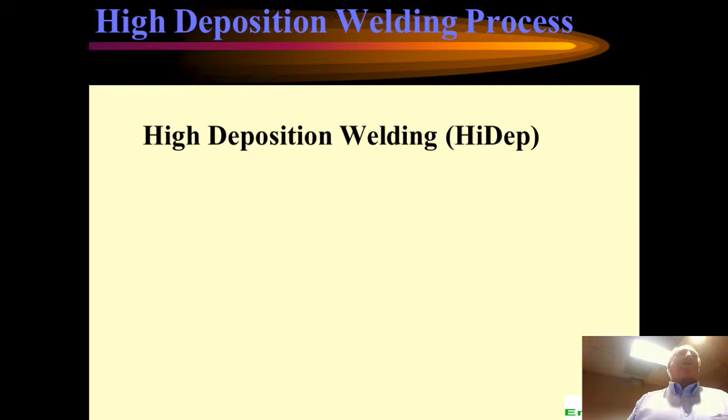I'm going to start out with this new process that we call high deposition welding. Officially it's going to be induction hybrid arc welding, but until we get the first one in production, which we're starting on right now, AWS won't give it an official name. So we're calling it high dep because we started out with it being high deposition. So induction hybrid arc welding might be the title of it. What we do is put a very high power induction coil in front of the torch, and then run it just like an ordinary welding process. But we have two independently controllable, equal power heat sources now, which completely changes our ability to do things to the thermal profile of the weld that we could never do with an arc.

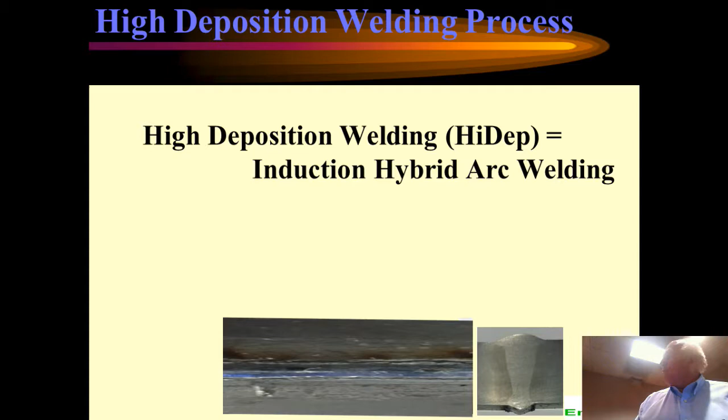So the advantages of this I'll talk about as we go forward. But I'm going to talk just about the basics of the process: butt joint welding with it, fillet joint welding with it, and another little benefit that comes along with it that I'll explain later.

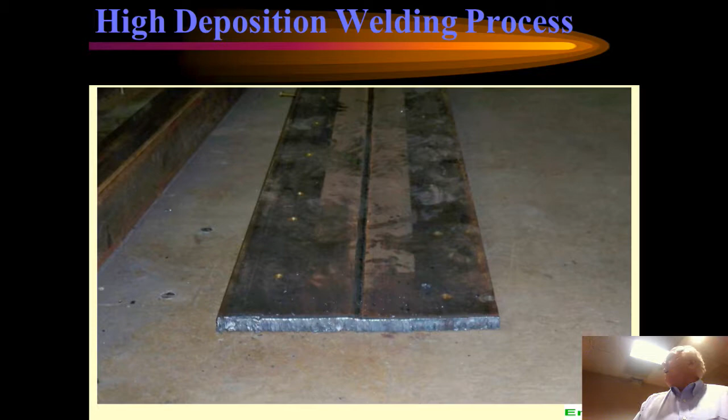So if we look at the process, one of the biggest advantages is that for essentially all the applications, we have completely eliminated weld distortion with this process. When we made the first weld, back in 2011, somebody noticed that the plates were sitting flat on the floor, that there was no weld distortion there. We created the process so we could go faster because we needed an application, but we've been exploiting this, and it's been the hallmark of it. We typically have travel speeds in the range of 4 to 8 feet per minute, and we can actually go faster than that. Single pass on 3/4 inch butt weld joints.

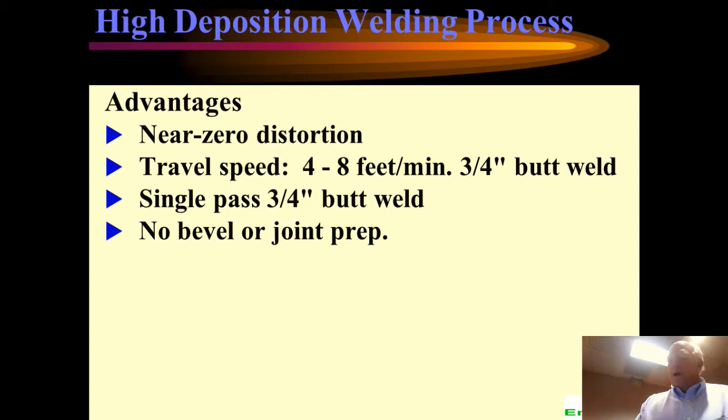We don't require any beveling or joint preparation. We just use a square butt joint with a fairly small opening. Flame cut plate edges - we don't have to do any special preparation to it.

The total capital cost is about 2 times what a standard arc welding system would cost. But when you compare it to the other process that's out there right now giving us low distortion welds, which is laser hybrid arc welding, there's no comparison in terms of capital cost. The laser is just amazingly expensive compared to this process.

So the operating cost, for the most part, because we can go faster, is actually less than for standard arc welding. It uses all the equipment that's already existing in most major fabrication shops. So it's not like having to go out and buy a laser and learn how to run it and maintain it and that sort of thing.

And we can make it portable. You'll see the equipment out here that we can use to make it portable.

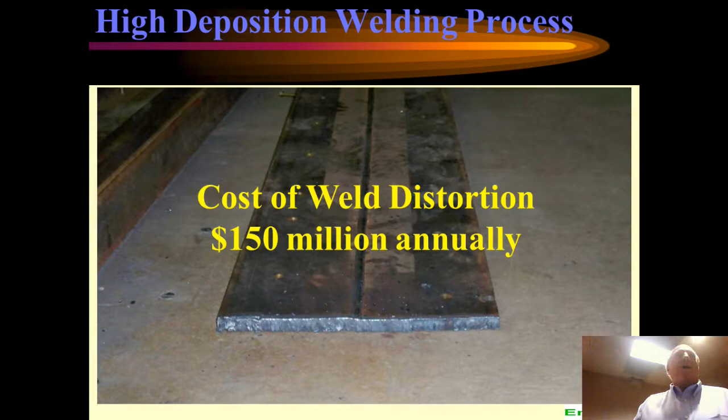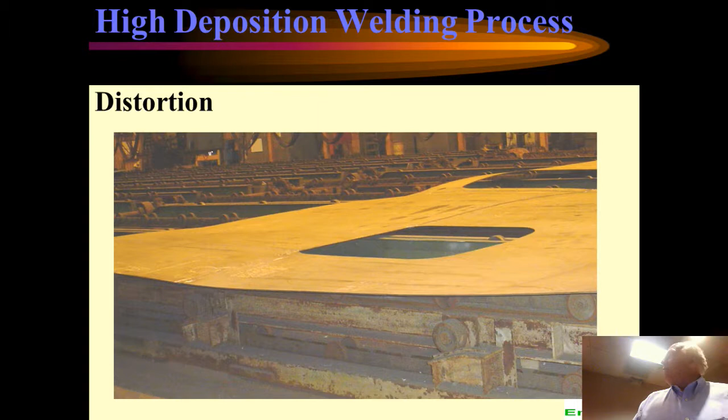The other part is - and I didn't bring a laser, so I'll go over here and point at it - if you look at how they make decks to keep the weight down, they'll have a deck plate and weld T-stiffeners underneath it. Where those T-stiffeners are welded, you get weld distortion, and that causes the deck to dip down like this. You can see this in the picture.

There's a T-stiffener welded under this deck here, and one here, and you can see the big gap underneath that straight edge. So those are the kinds of problems that we have in the Navy, and certainly in a lot of heavy fabrication applications that are due to distortion problems.

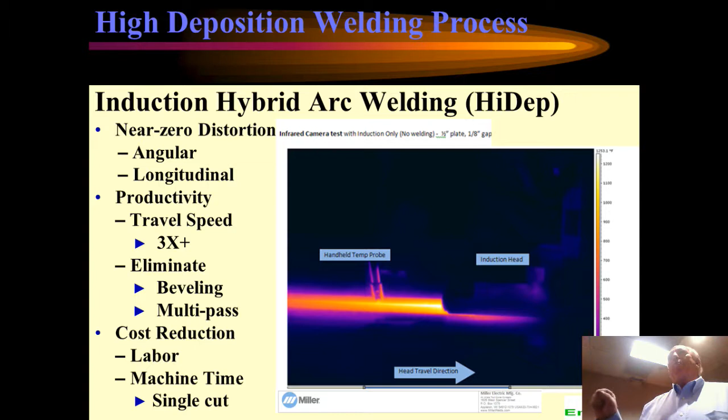Miller did a little work on this at first when we started looking at it, and they got us a nice video of what just the heating from the induction looks like. I think it's important to note - I know you can't read the scale there - but we are actually bringing the surfaces of the weld up to the melting point before the arc ever even gets there. That's really a key point to the process.

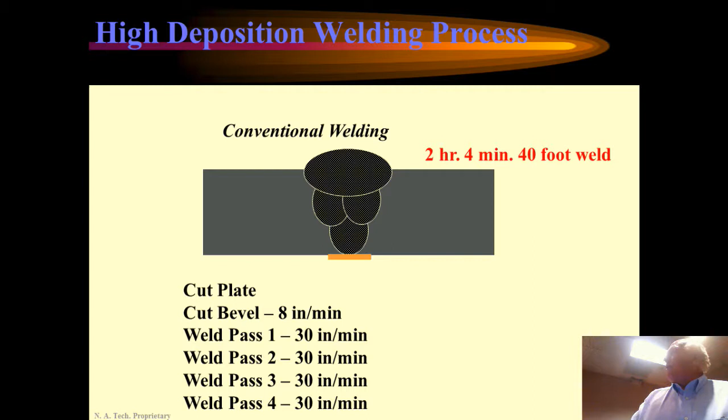So if you look at conventional welding on fairly thick material, we're going to have to make a V groove so we can get the torch down in there. Although Eric later this morning is going to talk about a new really cool process for not having to do that. But if you look at cutting the bevel and then making the various weld passes to produce it, the total preparation time plus welding time is about 2 hours and 4 minutes to make a 40-foot weld.

With this new process, the high deposition process, we're single pass - don't have to cut any bevels, don't have to make all those other passes - so we're actually at 8 minutes total preparation time and welding time.

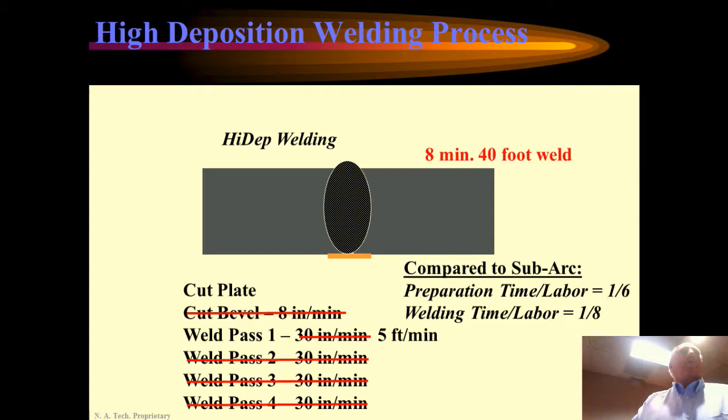And this is what we were after, because what we're trying to do is build the world's tallest wind tower. Wind tower structures are such that to go taller, they have to get bigger around. If you've seen any of these things being transported on the highway, we're done - we can't make them any bigger around and still transport them.

So the key is to make a portable, automated fabrication facility that can actually fabricate the towers on site and move from wind farm to wind farm.

In order to do that, to make it automated like an auto assembly line, we had a cycle time we had to meet to be economically viable. I have to make that 40-foot weld, including putting the plate in position, making the weld, and getting it set up for the next plate to come in - I have to do that in 15 minutes.

So I've got to make a 40-foot long seam weld in 3/4 inch thick steel plate in 8 minutes. I have to do that. So that was the reason why we invented the process and why we call it the high deposition process, because that's what we wanted from it. This really is quite an improvement over submerged arc, for example.

And if we compare it to the laser hybrid arc welding system, there's just really no comparison. I mean, it's just outrageously expensive compared to what we're doing.

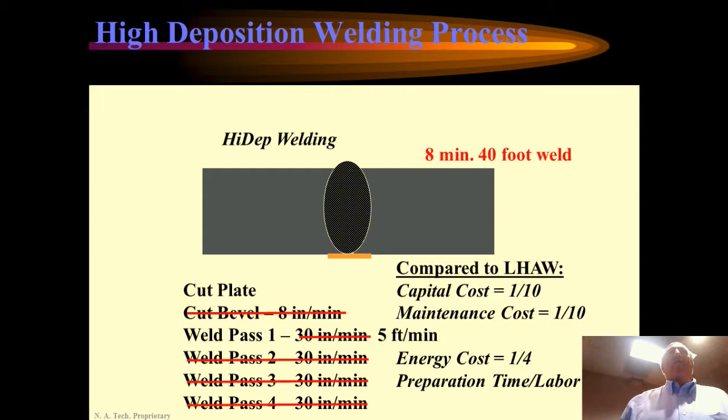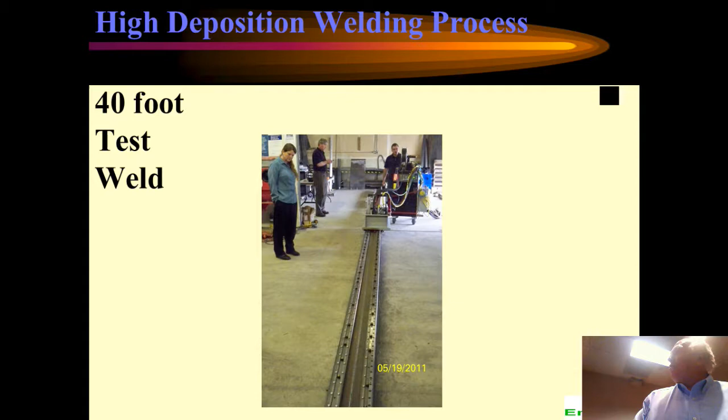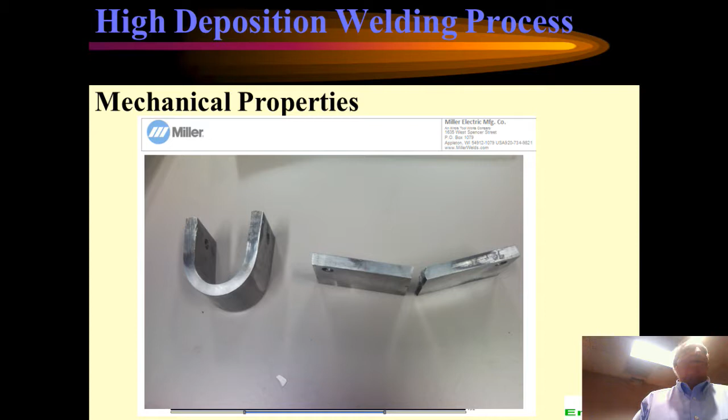This is kind of an interesting experiment that Miller did. They said, well, let's make a weld with this process, and then let's turn off the induction and see how much difference it made. Obviously the one on the left was made with the induction on, and the one on the right was made with the induction off. So clearly it made a big difference.

So basically what happens with distortion is that when you use traditional arc welding, the arc is a giant heat radiator. Everything closer to the arc gets hotter, and everything further away is colder, and so you end up with a thermal profile that looks like that. Those arrows indicate how much shrinkage takes place, and that's what causes the distortion.

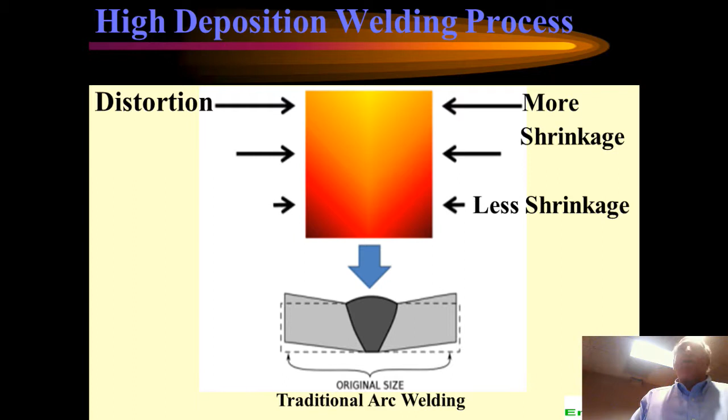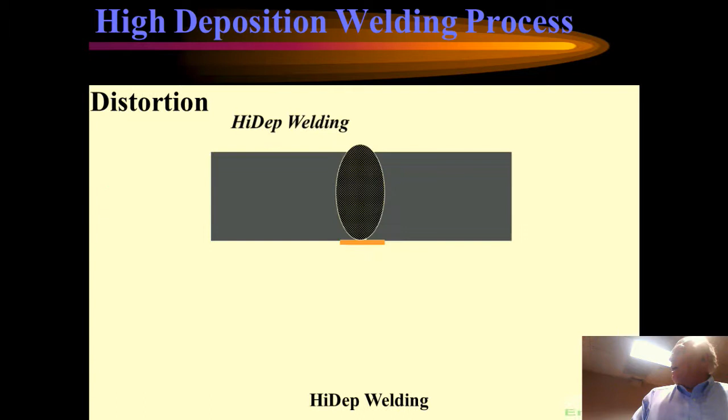When we do our process, we turn on that induction coil, and it actually heats the metal up to the melting point before the arc comes along, and it heats it very evenly. So we get an equal amount of shrinkage on the top and the bottom, and the end result is the plate sits flat.

Someone over in the corner had a question. What's the material thickness in this example? That is 5/8 inch.

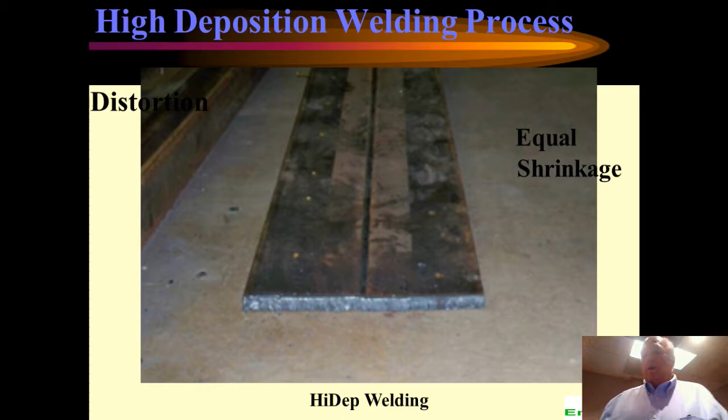So let's look at the butt joint welding we've done. I got a couple of examples. We were using Hobart Metal Cor 6, which has been renamed, it's now Fab Cor 86R. 3/32 inch wire that we're driving in there at about 680 inches a minute for the 5/8 inch material, 1250 amps. We're using 2 Miller Axcess power supplies, and then we have the 35 kilowatt induction power system out in front of it.

On the 3/8 inch material, we were running a little slower. This was one of the earlier ones we did, so we were running a little slower, both on wire feed speed and travel speed, obviously.

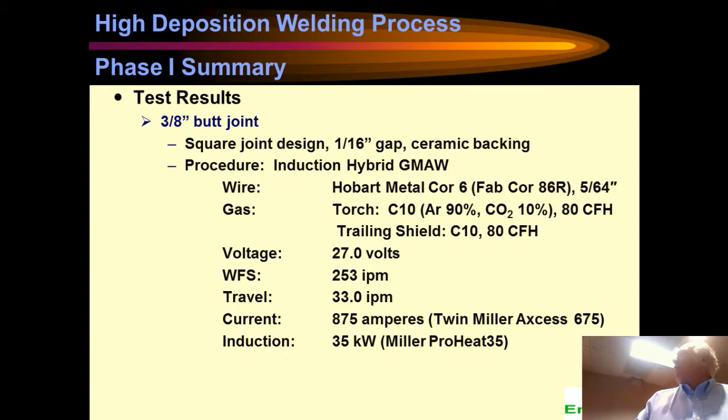I won't spend a lot of time on them, but there's tensile testing for both the 5/8 and the 3/8 material. These are Charpy tests that we did, and we did both the ones that would meet the American Bureau of Shipping, which is very similar to the AWS D1.1 code, and then we also did the Naval Sea Systems ones. The Naval Sea Systems ones require very low temperature Charpy testing, so we have to go down to minus 40 degrees with these, and in every case we more than met all of the requirements.

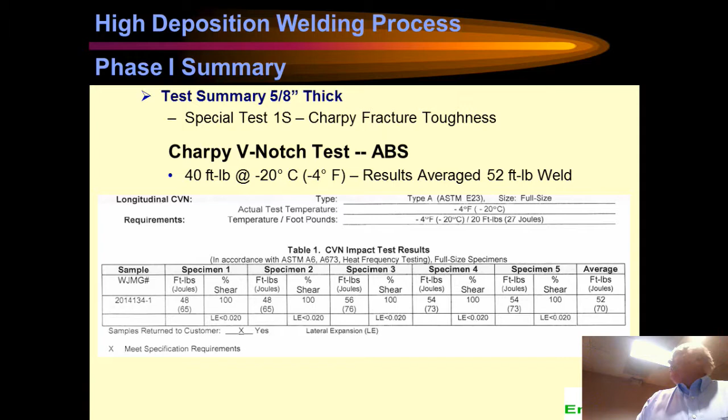This should look familiar to you, Jesse, because he did a lot of these tests for us. So both on the 5/8 and the 3/8, we met both the NAVSEA and the ABS or AWS requirements. That's what our weld shape looked like - almost parallel sides, top to bottom on the 5/8, and similarly on the 3/8 material.

Bend tests went fine, and then I get to the distortion, and so we did distortion measurement here on the 5/8 material. Over 8.9 inches, we got 1/78 of an inch of deflection. So it's pretty much as close to flat as you can get.

Oh, we have a microphone.

It's pretty much as close to flat as we can get.

Thanks, Bob. Everybody in the back, good? All right. Now, start from the beginning and do it over. All right. Wait, I've forgotten.

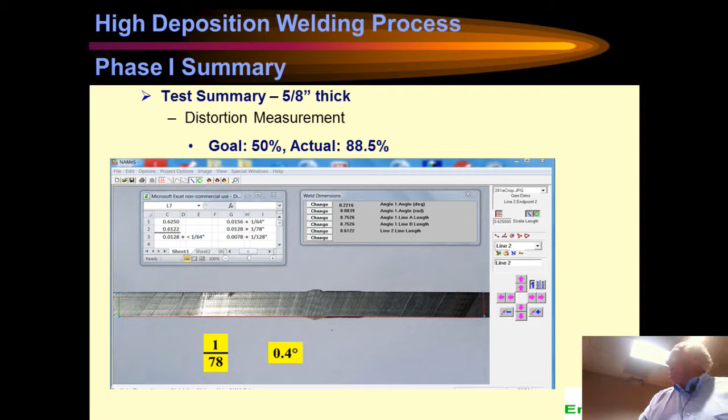On the 3/8, the Navy asked us to use subarc as a benchmark because that's the process they're using for these thick steels. So you'll see here the top is the submerged arc weld and the bottom is our high deposition weld.

In the longitudinal dimension, the top diagram in each one of those pictures, that's about a 4-foot section, and the subarc raised up about 5/8 of an inch on each end, and in the longitudinal dimension we didn't see any distortion. Nothing was measurable.

In the bottom, over about an 8.1 inch section, we got 0.02 inches of deflection with the high dep process, and we got almost 1/10 of an inch of deflection with the subarc process. So that was the benchmark they wanted us to compare to prove that we really were reducing the distortion.

Yes? So based on the gas content that you guys had for your torch, which was 90% argon, 10% CO2, have you guys ever thought about doing tri-gas for higher heat application? The most important thing is we have a fairly large liquid pool. We don't want it sloshing around, so we need a very stable spray transfer. With the metal core wires, you can go to a much higher current density and still keep a stable spray transfer. And we tried several different argon CO2 mixtures, but we haven't tried any other gases.

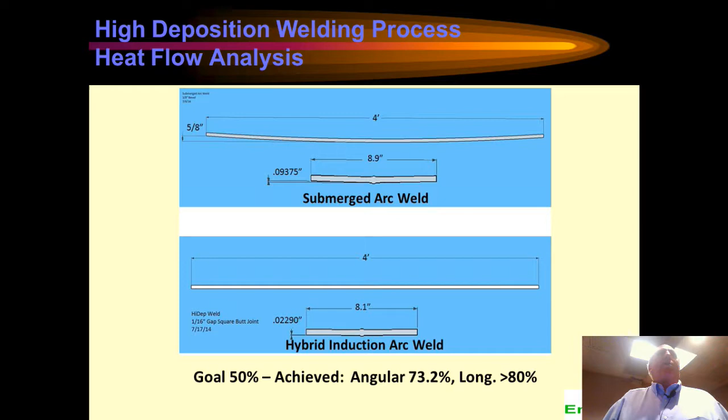Well, we're working with Praxair to look at some other gas mixtures, but we're not far enough along to really talk about that yet. Okay, so for the 3/8 we got pretty good results. We got 73.2% reduction in the distortion, and we got 88% in the 5/8 material. So the Navy was pretty happy about that.

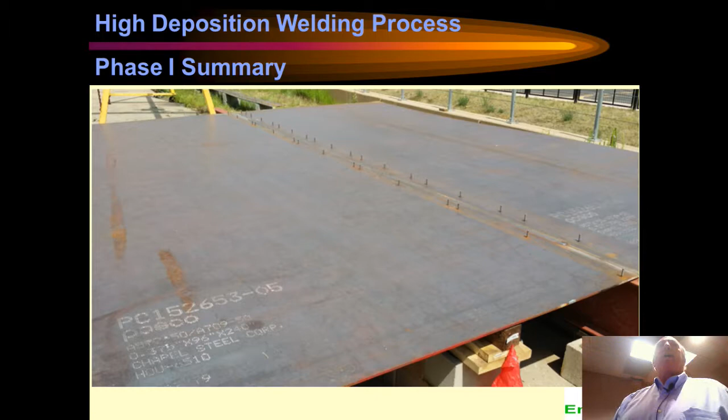So we did a demonstration. We welded two 8-foot by 20-foot 3/8 inch thick steel plates together, and these are our plates in Lakewood if anybody wants to come and see them. They're completely flat, the whole 20 feet in the longitudinal direction, and in the transverse direction, that's a piece of angle sitting on it, and it lays perfectly flat too.

So the next effort was to go into T-fillet joints, and we were concentrating for the Navy on two aspects. One was welding the T-stiffeners to the bottom of the panels to make the deck panels, and the other was manufacturing of the T-stiffeners themselves.

In the past, they've made T-stiffeners by buying H-beams and cutting them in half, but the problem with that is the top decks of the ship are where all the weapon systems are, and that makes that part of the ship heavy. Well, you don't want a ship that's top heavy because it wants to do this.

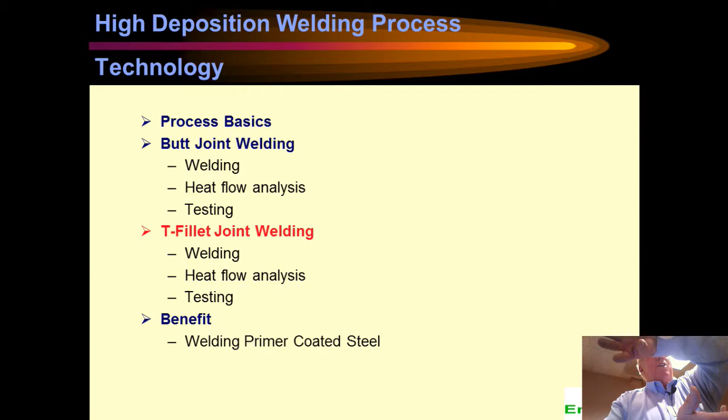So when you make T-stiffeners out of an H-beam, you engineer what size you want, and then you look on the H-beams and you pick the next size up because you can't ever get the exact size you want. And they still want to save even more by fabricating their own T-stiffeners. So we were looking at both problems for the Navy with this effort. So that's basically the problem we're going after.

This is a bunch of heat measurement we did on this one. We weren't exactly sure about how the heat distribution could reduce the distortion. And so we brought in Jim Dido. He has a company in Ohio that does really good finite element modeling, and they modeled both the electromagnetic field and the thermal profile of the material for us. And so we did a lot of temperature testing on the front side and also on the back side, making welds.

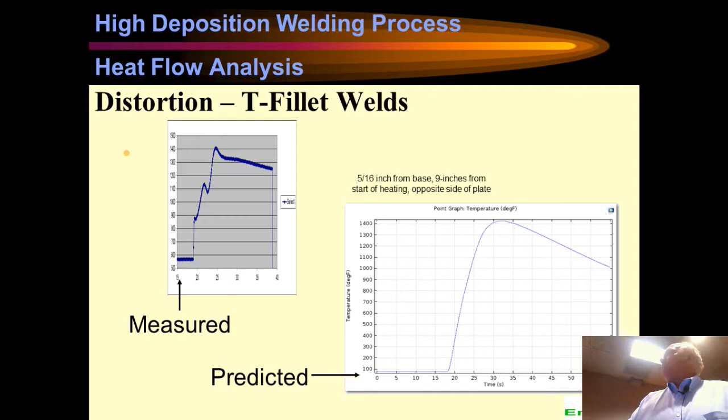And the measured temperature profile with the temperature measurement system is on the left, and the model is on the right. The rise time is perfect. We hit the peak temperature almost exactly, so we feel very, very confident that our models are giving us the right information. That's basically all the math behind it.

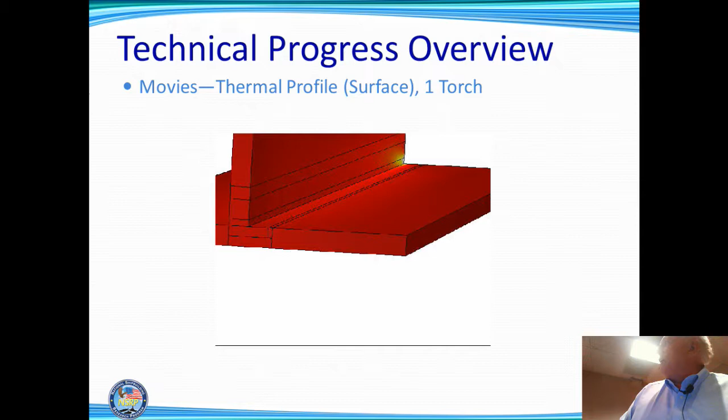So I brought along a couple of these little videos so you can see, and I'll go back with this one. We actually heat the material up on the discontinuous member a little bit here. If the T-fillet's like this, we actually heat it up there to get the right heat flow to reduce the distortion. So you watch again, you can see the induction and then the arc down on the bottom. And I've got a little bit better 3D model, so you'll see the heat at this is in cross section. I'll go back and run that again.

And we used this to figure out exactly where we should put the induction heat to get the heat distribution so that we would essentially zero out the amount of distortion we got. So the fact that we have these models will help us a lot now as we move forward to looking at things like aluminum and other materials, because now instead of having to do 800 welds, which is how much we did, nobody had ever done this process before, so we didn't have any good rules of thumb. So this was a lot of welding engineering, try one thing and try another thing.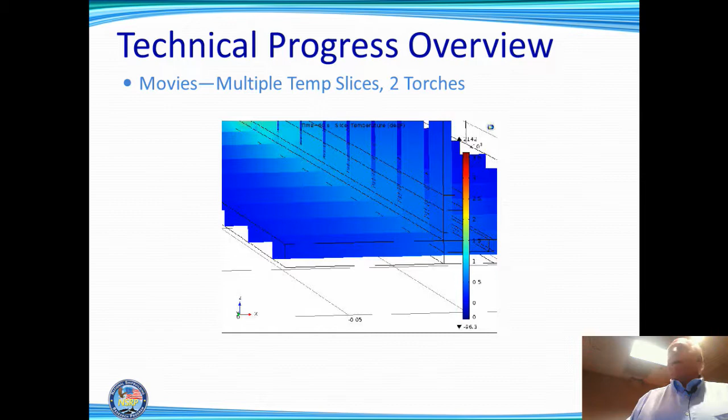So from now forward, though, we have these computer models which will help us zero in on one. And we just did one for Bollinger Shipbuilding, welding 4.5 millimeter material for them. And I think we came up with a good procedure in about 10 welds. So we're getting better. So here's a video of the front side, I think.

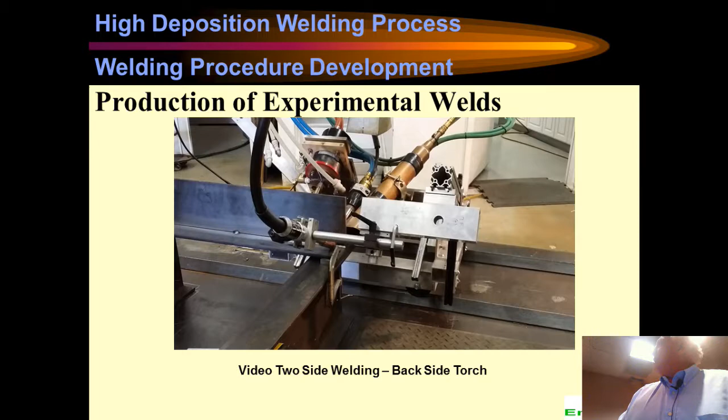Oh no, I think maybe this is just a picture I have. Yeah, and there's the two-sided welding apparatus for T-fillet joints, and there should be videos here running. Oh, there are. I just have to push the button. There we go. All right, so you're seeing the front side weld here, and it's going to split the screen here in a second and go to a high dynamic range camera.

And the interesting thing here, if I can carry this over there with me, is because the metal is up at the melting point, the arc is actually sort of machining its own joint. So you'd like to have a J-groove, that's always perfect, but nobody can ever afford to machine J-grooves. But the arc is actually machining a J-groove that's exactly the right size for that arc, all by itself. So that's kind of one of the neat things we found.

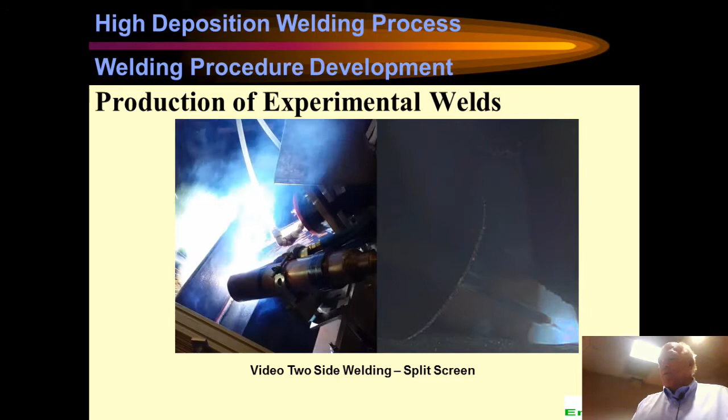We have this camera outside, by the way, if anybody wants to take a look at it. Visible Welding just came out with this camera, and you can see not only the arc, but all the surroundings using this camera. All right.

All right, so I just brought this up. That little red dot in that chart on the bottom right-hand corner shows a typical spacing, 25-inch spacing with 3/8 inch thick deck plate, and that's the Navy allowable, the amount of out of fairness the Navy allows, which is actually 0.375 inches between those two 25-inch spaced stiffeners, and our distortion, instead of 0.375, we're 0.043. So we're 88.5% less than what the Navy even allows.

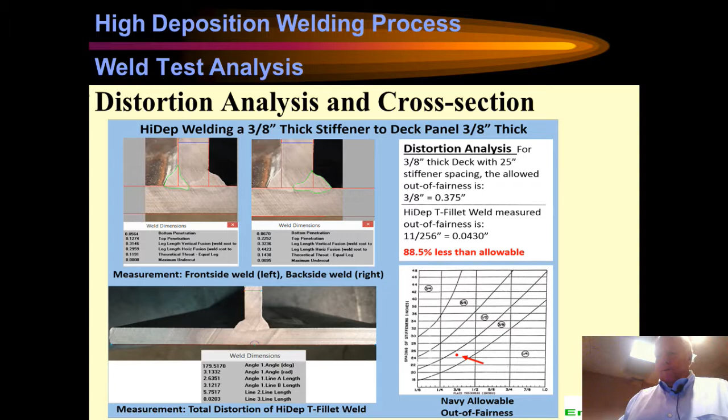And right now, they're spending $30 million a year straightening deck. So the current process that they're using isn't even meeting that requirement, and we're 88% better than that requirement. So one more shot there of essentially zero distortion fillet welds.

Now I want to move to mobile remote welding robots, and we have one out here for you to take a look at. So how do you make a mobile remote welding robot? You think of a robot in a car factory making arc welds on safety critical components on a frame or something like that, and a lot of programming time goes into making that robot actually operate. And if you're going to make 200,000 parts with that robot, all of that programming time is worth it.

But just to give you an example, the last time Dodge made a changeover in the Neon vehicle to a new model, it cost $2.4 billion to do that in their assembly plant, and half of that cost was programming the robots. Half. So that's the problem with applying robotics to one-of-a-kind or few-of-a-kind applications: the programming time is just prohibitive unless you're going to make an awful lot of parts.

But again, technology is coming along that's very interesting, and what we've developed is a robot that operates remotely but has a human operator controlling it. The human operator sits in a virtual reality cell with a torch that's being tracked by an infrared camera system, and everything that the human does with that torch, the robot arm on the torch does the same thing, but it can be 500 feet away up on a big structure making welds.

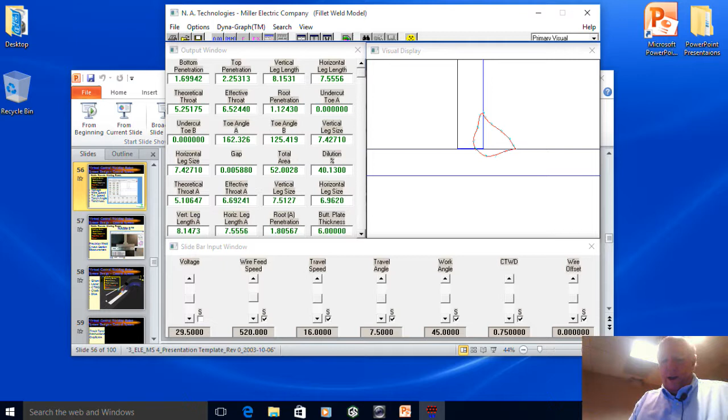So just to show you how fast it operates, each one of these parameters down here, voltage, wire feed speed, and so forth, is marked. It's got a little slide bar on it. If I grab this and move it, you can see up there in the graphic that the shape of the weld changes instantaneously. So I'm calculating all those parameters and calculating the shape of the weld as I'm changing that parameter. So we now take that data live with a set of sensors, and we can tell you instantaneously whether that weld is actually the right shape and size and is going to meet the requirements for that welding code.

All right, so let me go back to the slides here.

We need to make bigger print on these things or get me a new pair of eyes, huh?

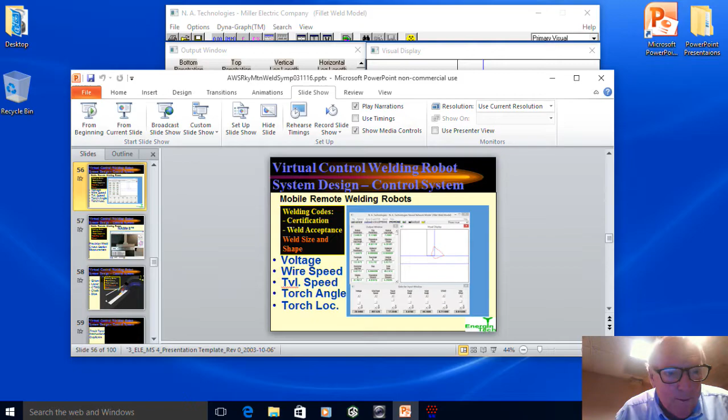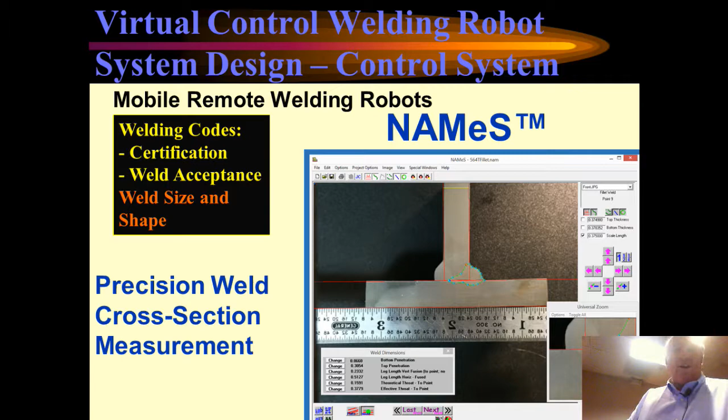All right, so we got that part done. The next part we needed to do is basically test it and see how it worked, and we did a lot of measuring to verify it. And then we had to build a virtual reality system that would do that.

The first thing we had to do, we worked with a company called Natural Point. Now they create quite an interesting tool that can be used for welding applications, but they didn't have one when we first started this. Now we can track the torch and draw it in a virtual reality graphic.

So now the human doing this can look at the video coming from the torch or look at this screen here. There's some interesting features of this screen. For example, if the welding procedure specification calls for certain torch angles, we can draw this little wireframe torch that moves along with it, showing exactly what torch angles they should be holding. We can tell them if their contact tip to work distance is too far away, and then pop a little arrow up to tell them to move down a little closer.

Yes? Uh-oh. Hello? Bob? Did I lose it? Yeah, maybe it does. You're right, it's not working. Right, John. I'm not sure this thing is... It may have died because of the batteries. It says Mike. We're in trouble, Bob. I'll try and yell louder. Bob, this thing forgot. All right, I'll talk a little bit louder.

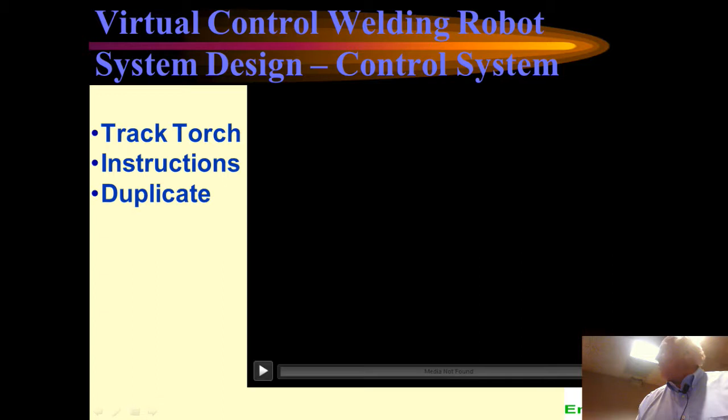Yep. Like flying a drone over Afghanistan? I think this is far easier. I read on the news the other day, or heard on the news, that some of those guys are flying 4 of them at a time because they can't get enough pilots. All right, come on.

This video doesn't seem to be working. Oh well, anyway, so at least you know how it works, and you can see it out there because we're actually driving the robot with that system. So I can't get that little video to run here.

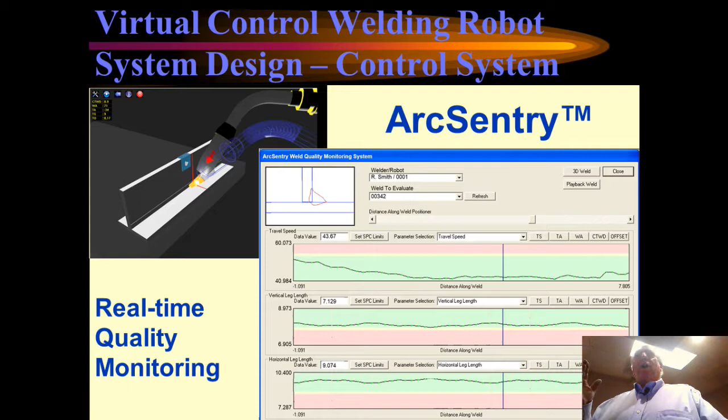But the other thing we can do, which is quite nice, and this was of strong interest to the Navy, and we've talked to Caterpillar and some of the larger contractors, is that we can produce, as soon as the weld is done, a complete quality control report. For every slice through the weld, along the weld, we can tell exactly what size and shape of weld is being made, and all of those engineering parameters can be plotted on a plot like this, color-coded red, yellow and green, so we can see how well the welder was doing in terms of holding the parameter.

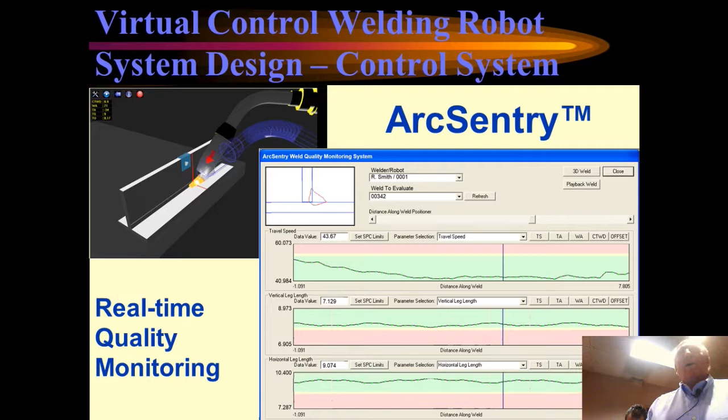And this is not only the welding parameters, but all those engineering parameters. So you can plot those and see how the weld was, and you can also create a 3-dimensional image of the weld like that, turn the plates transparent, and color-coded, so if there's a defect in there, you can see it.

Tower Automotive started using this product on their frame line for one of the Ford truck frames, and the frame continues on down the line having welds made on it. When it gets to a repair station, the guy there can bring up this image and look at the weld in 3 dimensions and see where the problem is.

This particular one was a weld on a system we've got installed on a line over in Norway that's making the side impact beam that goes underneath the dashboard of a car to protect it from caving in when it gets a side impact, on an Audi. In this particular case, there was a fingerprint on that aluminum part, and you can see they got a lack of penetration defect because of the arc instability that occurred from the oil in that fingerprint.

So we can detect those kinds of things with this system in real time, and then produce an afterward digital quality control report that allows you to bring up any of these graphs and look at the weld from one end to the other.

All right, so I wanted to mention this kind of interesting benefit that we discovered. A lot of heavy fabricators put primer on their steel until it's ready to be fabricated. And then they have to go grind the primer off because it ends up causing porosity and other kinds of defects.

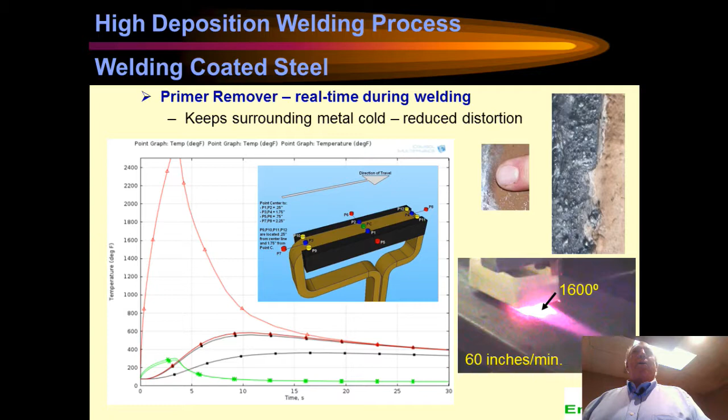So that's another picture of that system doing some tests.

All right, so we took this process and went a little further with it, and we said, okay, what if we take that induction coil and put a cutting torch behind it instead? What might we be able to do there?

The scientific concept is basically that when you're using oxy-fuel cutting, the flame heats the surface of the material up to what they call the auto-ignition temperature. If you're above the auto-ignition temperature and you hit it with oxygen, it immediately turns into iron oxide, and that reaction gives off a lot of heat, and that's actually what's doing the cutting.

So all you have to do is maintain the surface of the steel at that 1600 degree temperature and then shoot oxygen at it, and it cuts through the material. So the key is how fast you can heat the surface of the material up to that 1600 degrees.

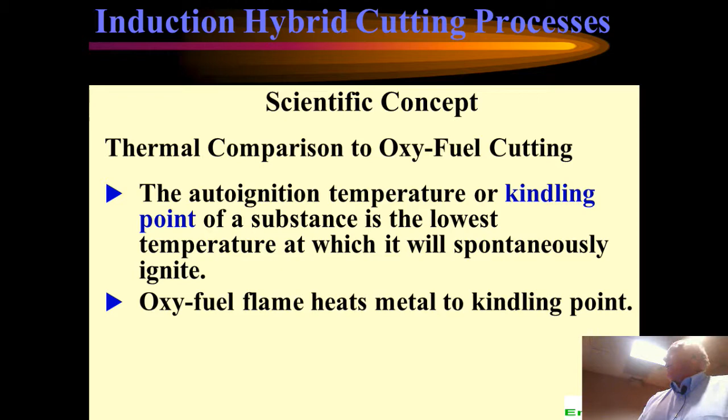So we started looking at essentially induction oxygen cutting. If you look at it, there's really no fuel any longer — the induction coil is doing the heating, and along with the oxygen, we're doing the cutting. This is basically the equation that covers it.

The important part of this equation is that's a constant. So the time it takes to get to that auto-ignition temperature, that little T, is a function of how hot you have to get it divided by essentially how much heat you're putting into it. The heat is that heat flux term, which is in watts per unit area.

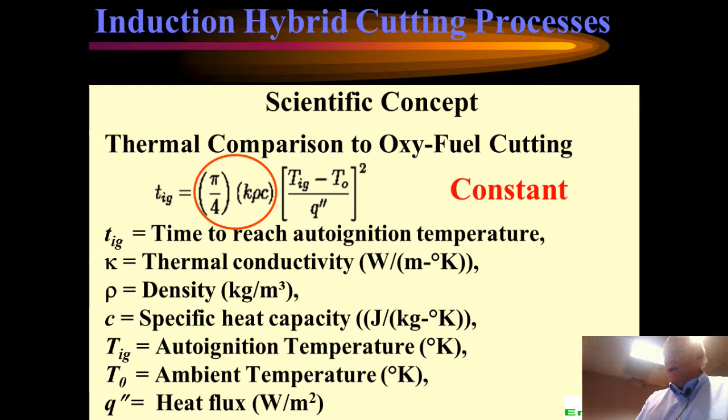So if we take a look at oxy-fuel cutting, we have an application for the Navy, I'll show you in a minute - kind of a cool application. An acetylene torch gives us about 48 million in terms of heat flux, but that 35 kilowatt induction coil is giving us 1.4 billion watts per square meter.

So this means we can dramatically speed up the rate at which we can move that cutting system. So that's just that comparison again.

So the thing the Navy wants us to do - everybody knows we have nuclear submarines out there - and it doesn't look like this video is going to run either. Darn. Okay, well, the United States has nuclear submarines.

I had no idea how many of them we have, but there's a bunch, and we're starting to retire them. The original ones built after World War II are now being decommissioned, and those things are 40 feet in diameter and about 350 feet long, with a hull of several inches thick steel.

The exact thickness is classified, so we can't talk about it, but you can imagine how long it takes to cut one of those up. Right now with oxyacetylene torches, it takes about a year and a half to cut one of these things up. They're behind by 7 right now, about 9 years behind schedule, and they have 47 more.

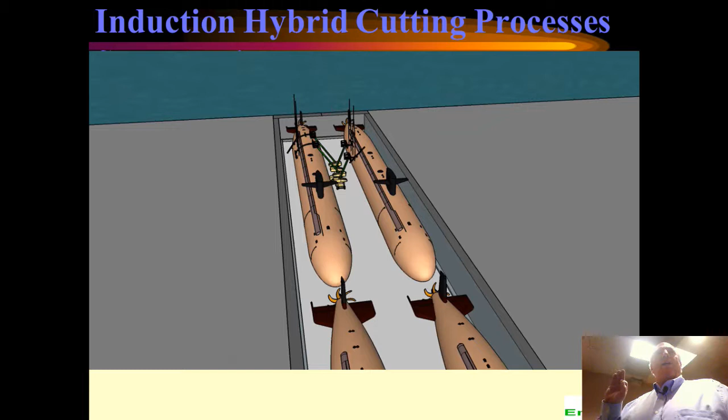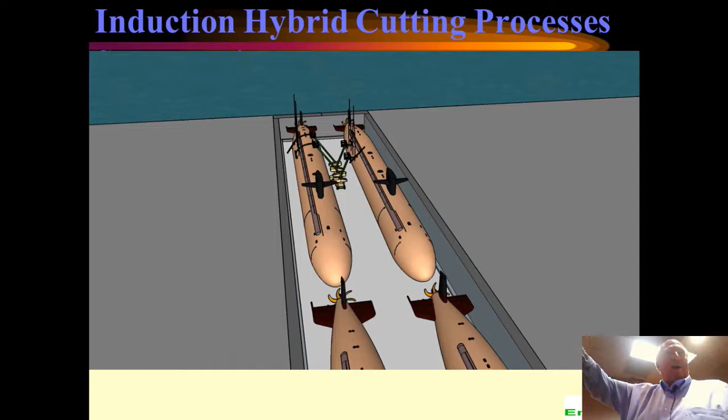So the question is, could we cut these things up faster? There's another slight problem I'll get to in a minute - there's a coating on them to keep the submarine hidden from the sonar beam that hits it, to keep it from reflecting back. Again, that's classified, but one of the things in it is rubber.

So when you try to cut that thick steel, going as slow as you go, the heat spreads out into the surrounding material and billows of black smoke come off of that coating. So that's the second problem we're trying to solve.

Anyway, that's a picture of 4 submarines in dry dock, and here's some pictures of our machine. It's actually going to be mounted onto a man lift that has a 3,000-pound lift capacity and an 80-foot boom, and it's kind of a complicated apparatus.

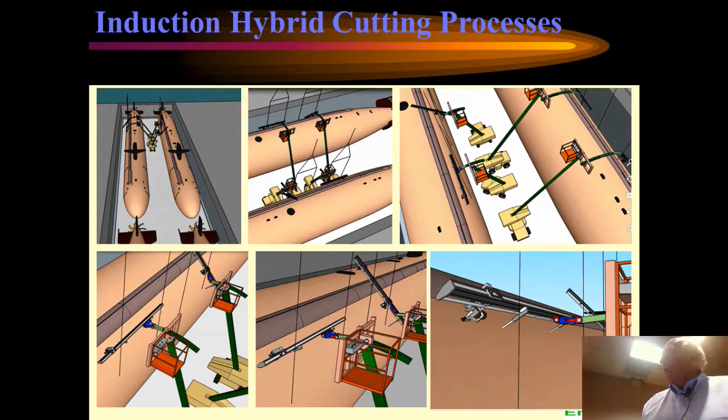You can see the boom is going to hold it up against the side in various positions, both going around the submarine as well as along the submarine, and we're going to be cutting it into 8-foot by 16-foot pieces, which are as big as their crane can lift. That's basically the goal. That's what one of those things looks like.

Here's the problem. There's Puget Sound, and Seattle is right next to Puget Sound, and they're not real happy about pollution there, so all that big black billowing smoke is not allowed. The reason we have to cut them in Puget Sound is that little red dot in the lower left corner is Puget Sound Naval Shipyard - the reactor has to start there and follow that blue line on a sea barge up the Columbia River, and at the other end of that blue line is the Department of Energy Hanford facility.

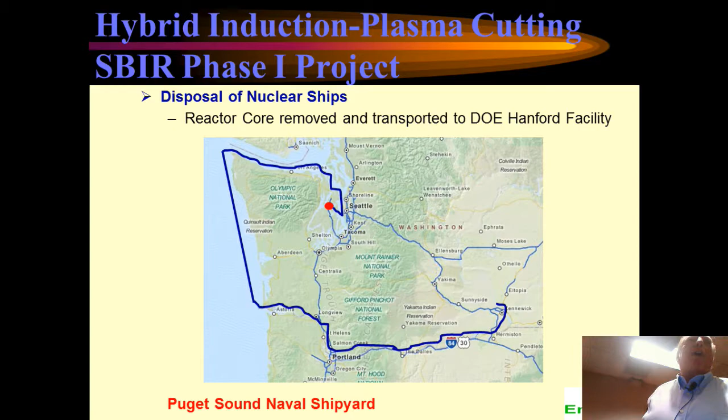A long time. So they basically slice the submarine like a hot dog where the reactor core is, move the 2 pieces away from it, weld 3-inch thick steel plates on each end, and that is the cask the reactor core is inside of - the submarine hull and these pieces - and that's what goes into that trench.

So there actually isn't any other good place to cut the submarines up except that spot. So that's why we have to solve the pollution problem.

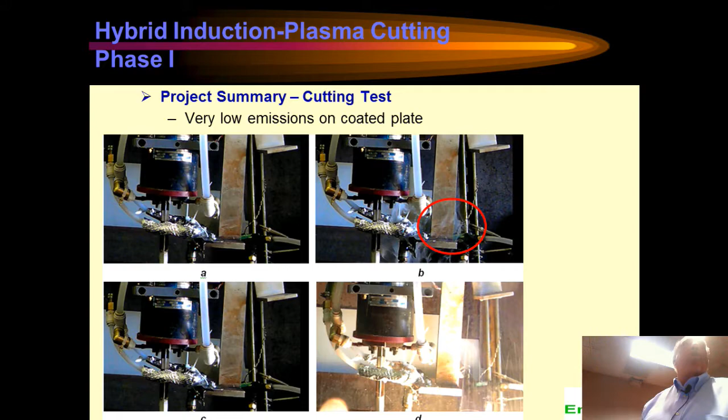So this is a test that we did cutting some material with this process. That little red circle shows you that's the only smoke we get. So we seem to have solved the problem.

Right now, to get rid of that coating, they actually have to grind it away 9 inches on each side of the cut. But we're going so fast that we only burn the coating about 3/4 of an inch on each side.

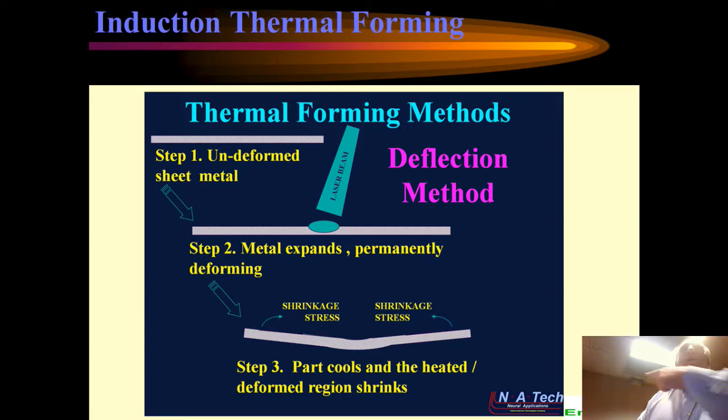So we're basically cutting that submarine steel. Our goal is to be able to cut that multi-inch thick steel at about 5 to 7 feet per minute. That's what we're able to do in our lab right now, and we have a contract to build those machines now to go into the shipyard.

So the other thing I wanted to talk about is creating weld distortion. Now we've been talking about how to get rid of weld distortion, but what if you wanted to make something without having to apply any force to bend it? So we've been working on a process we call thermal forming, where we use heating and cooling in the right ways to get materials to bend without ever touching them, just the heating and cooling of them.

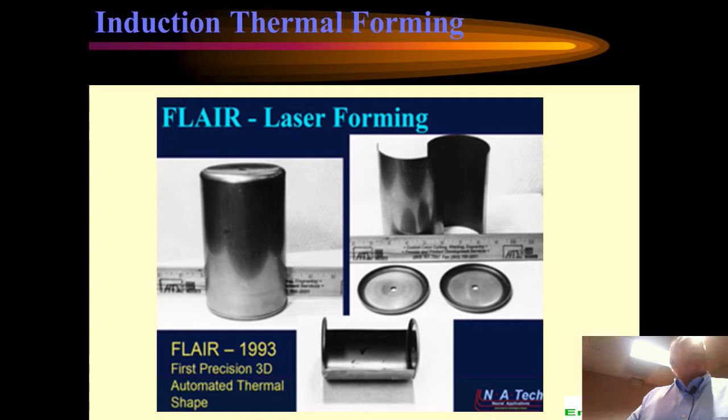So we started out using lasers, and that's a little stainless steel tank that we made several years ago for Lockheed Martin, and each of those pieces is actually laser welded together. So we can very precisely form a shape now by using just heating and cooling.

Is that testing destructive or non-destructive? I can't quite tell, which testing? The one you were mentioning previously with the heating and cooling. Oh, it's non-destructive. It's not testing, it's actual forming, bending. Oh, okay.

That's before we invented the welding process that hopefully will solve the distortion problem for them. But again, an advanced technology portable robot, because this robot scans the deck and makes up its own program to heat it and cool it in just the right places to bring it back to being flat.

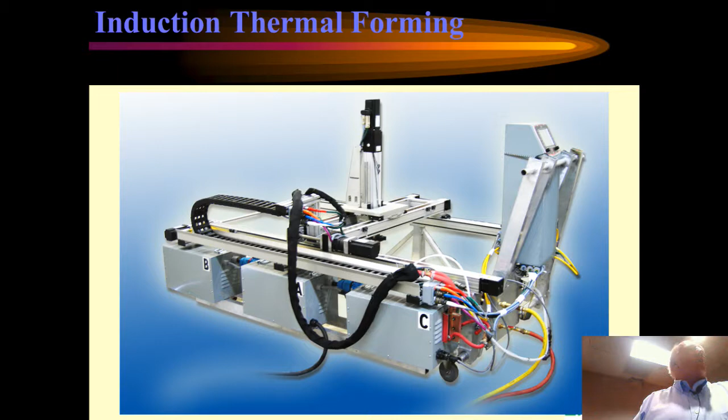And so it's kind of an interesting robot, and the nice thing about it is a lot of people can use it. The robot there is at Ingalls Shipbuilding where they make the destroyers, and Nora has MS. So this basically allowed her to have an opportunity to keep working instead of having to get down on her hands and knees with a torch and a water hose and straighten the deck.

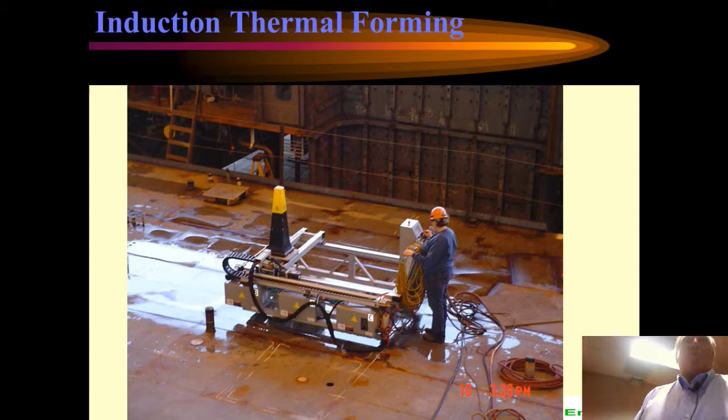How long would it take to do like an entire deck? I'm getting there, good question. So that's what the machine looks like out there.

The interesting thing about it, and again, let's see if we can get this video to run. The shipyard came to us and... this one's not running either. That's the problem when you move it from one computer to another. But what those guys are doing is putting the robot together.

So you think about, you go buy a standard off-the-shelf robot, and you go to install it someplace, and it takes several days to do that. The goal the shipyard gave us is that this robot had to be able to be disassembled into 50-pound pieces that could be hand carried down inside the ship and put back together, and it had to come apart in 9 minutes.

So that's what these guys are doing. These are the shipyard guys in their first training session. And so that robot system can, because the ship has to be welded together and all the distortion in it...

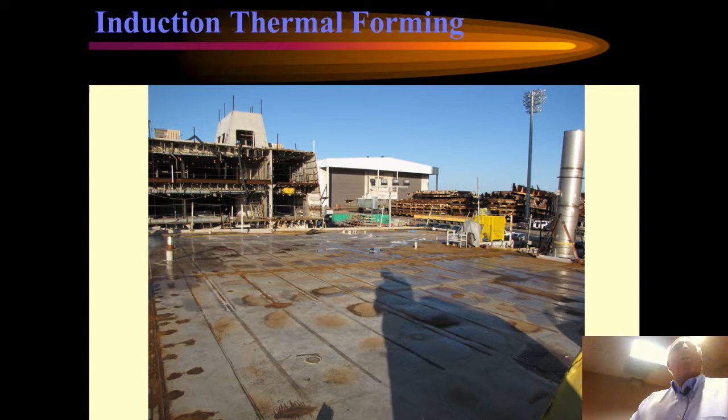Here's a report written by Northrop Grumman about the machine. That's a deck we did in an industrial engineering test, and they had us straightening with the robot - well, actually their people, but our robot. They had one of their best straighteners out there with a torch, and we got our section very straight. In a week's time, 40 hours, they did 17 of those roughly 6 foot by 2 foot rectangles, and we straightened 44 of them. So we were 2.5 times the productivity level, but our system heats and cools so fast that the paint on the other side never gets hot.

With a torch, it heats so slowly that there's plenty of time for heat conduction through, and it catches the paint on the back side on fire. So they have to have a second person with a fire extinguisher underneath there - it's called a fire watch. We don't need that, so we can actually straighten the deck 5 times the speed of the manual torch process with this robot.

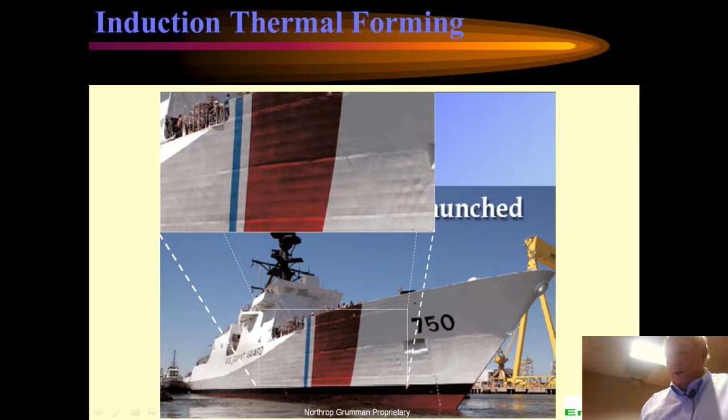So then after we got the deck plate system running, they had us build one that would do bulkheads - basically those are walls - and also hulls. You can see the side of that ship, all the distortion, all the weld distortion, making all those ripples in the side of the ship. And so we're using that same man lift. We have a system now that also does the hulls, so it'll straighten the hulls.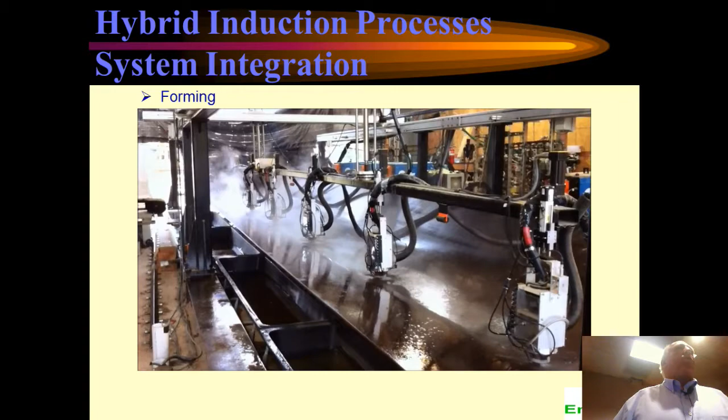You remember I talked about the largest, tallest wind towers in the world? We have to bend that steel plate. So we get flat plate delivered, 10-foot by 40-foot sheets of 3/4-inch thick plate, and we have to bend it. We have a prototype machine that has 6 induction, 35 kilowatt induction heating heads on it right now. The final machine, assuming we get the investment money and get it built, will have 74 of those heating heads on it, and we can bend a 10-foot by 40-foot, 3/4-inch thick steel plate into the shape we need in that 15-minute cycle time that we have to do it.

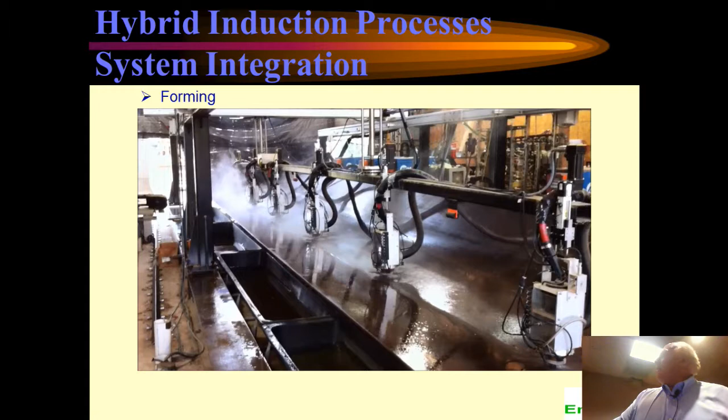I have a couple other pictures. We've got about a quarter mile long portable assembly line out in Oklahoma, and inside that old barn is the forming system, and you can see the kind of bends that we're getting in that plate. It's actually corrugated, so we do a reverse bend here and then a forward bend there, maybe a little close-up there. So that's what we're doing to that 3/4-inch thick steel plate with that thermal forming technology.

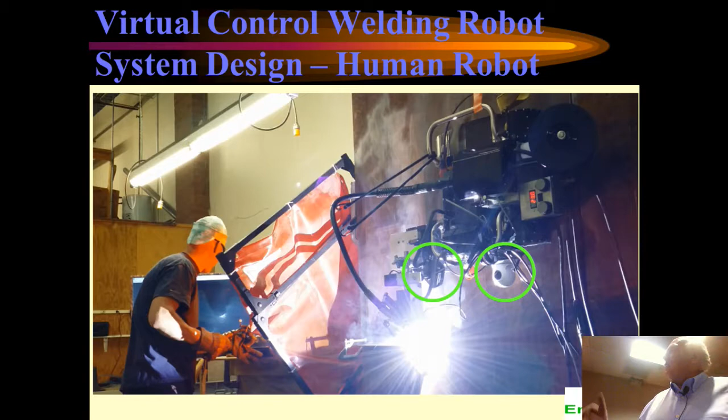So that's what we're doing with portable robots there. Now, finally, this is the one that we have out here for you to take a look at. Those little circles on there - the right-hand green circle is what we call a nanny cam, just a standard camera, and that's what the person uses to drive the robot to where it's going to go.

It's a crawler system built by Robotic Technologies of Tennessee, like a little bulldozer with tracks on it, except they're magnetic, so it can crawl up a steel wall. It can hang upside down. It can carry about 150 pounds, and it can travel at about 130 to 140 inches a minute.

So we put a big heavy-duty machine torch on there, and we can weld at speeds of 140 inches a minute with this thing. There's where the arc is, and the left-hand green circle is that high dynamic range camera. So the person driving it can see the arc and all the surroundings around the arc much better than they would be able to see if they were wearing a helmet, for example.

And John there, as you can see, he's not looking at where the weld is - he's looking at the virtual reality screen, and he's holding the portable torch. Like I said, you'll be able to see this thing operating at noon today.

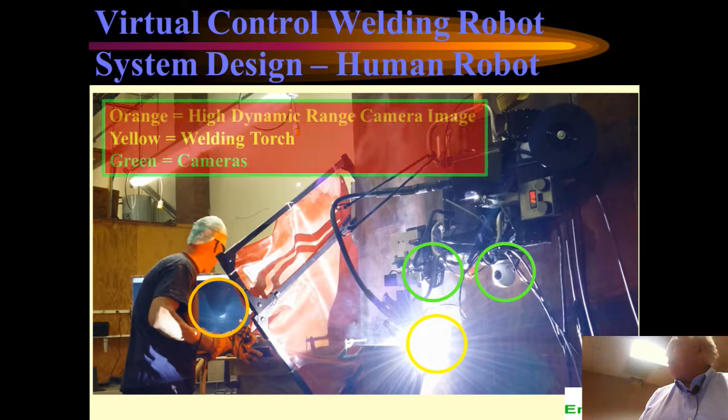So that's what the screens look like. The bottom screen that he sees is the camera image. The top screen is where the virtual reality is. That's what the robot looks like - so this part is the magnetic crawler.

On this particular one, we had a 6-axis arm. On this one, we have a small 4-axis arm. It carries its own wire feeder, or it can feed from a stack pack. So if the stack pack is on the ground with a push-pull feeder system, we can put a 600-pound stack pack of wire on this robot, and it can crawl around on the side of a large steel structure and weld all day long, basically.

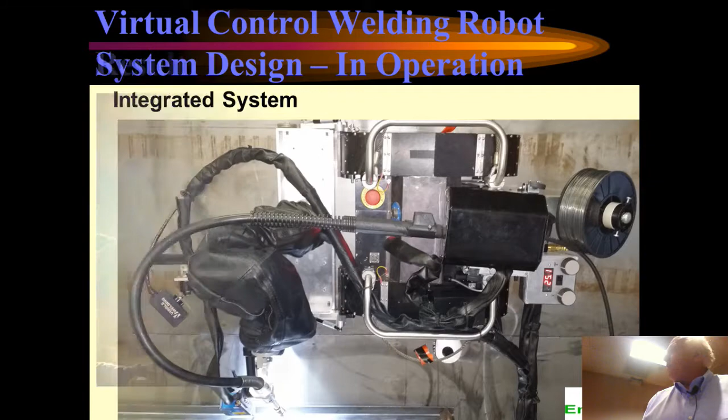So that's what it looks like, and that's another video. Let's see if it'll run. It doesn't, so you'll have to watch it at lunchtime. And it makes pretty good welds, actually. We call it a cobot.

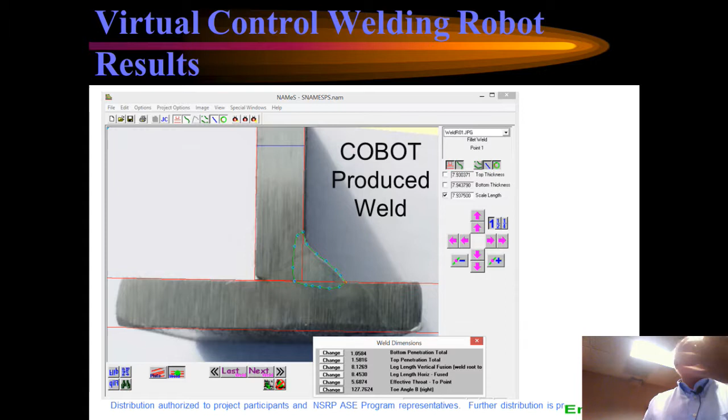NASDAQ now actually has an index for cobots. That's collaborative human-machine systems or robot systems, and that index grew by 500% in this last year. So collaborative human-machine robots are actually taking off worldwide in terms of where they're going, and we think it should be applied to welding too. So, thanks for your attention. Questions?

Back to your welding process. Several questions. Do you have to develop welding procedure specifications, and which codes do you do it to? Well, right now, everything we're doing is for the Navy. We are talking to several large fabricators who are interested in using it in other applications. Most of them are actually using A709 grade 50, which is exactly the same as the EH36 marine steel that we've been using, but we will be developing procedures for them. So just like any other welding process, you'll have to develop a WPS, get it approved, and be qualified.

And the people that operate it, are they welding operators or welders? Well, it's a robotic process, because the induction coil and all that stuff is way too heavy to carry around. So it's not a manual process, it's a robotic process. So you don't really qualify a robotic operator, but you qualify a robotic welding procedure for that robot system.

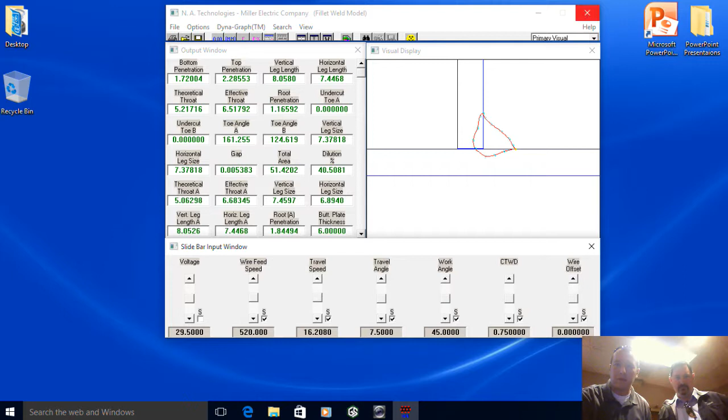We're running off this laptop. Do you have a little port that I could put this on? It doesn't have QuickTime, is why some of his videos weren't playing. Yeah, I saw a tiny little blurb that said it didn't have QuickTime. Now I only have 3 videos. I'm not sure if any of them are QuickTime, but if you want to download a QuickTime driver, that might help. I'm surprised it doesn't.

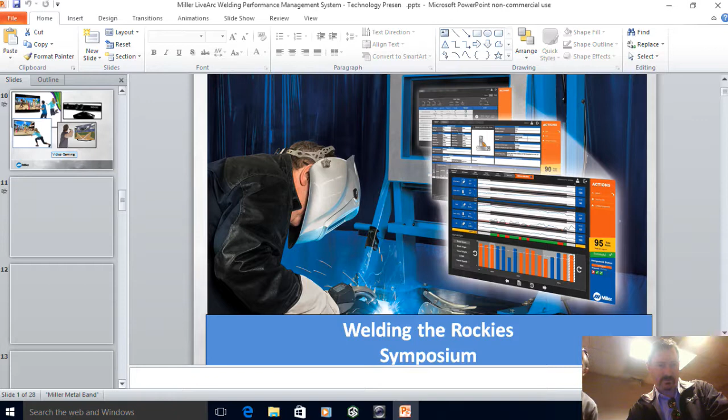So is my presentation on there? This is your jump drive, right? Yeah, that's another one. Your PowerPoint presentation. Okay, so we're there. Good. I'm up next. Can we check this while we're here and see if that video is going to work? Because we're broadcasting these out on AWS. Just make sure that'll work. And we have sound and everything. I don't know if we actually have sound on that.

All right. Nope, no sound. Yeah. I just hope not to put people to sleep. That's my challenge. I think it's a good, I don't see a... Well, no, that's your power cord. Yeah, no, there's no sound. I noticed a little pop-up that came up. They've got to have sound in here somewhere. I know they do. That was one thing. Mark, you don't have QuickTime. That's how we read it. Yeah. Okay.

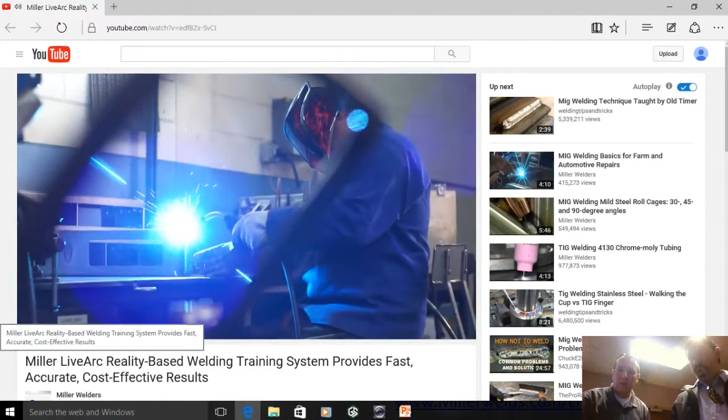How about this? What if we do this? Introducing the LiveArc Welding Performance Management System. A revolutionary, reality-based training solution from Miller that offers exactly what you're looking for. LiveArc is an advanced weld trainer that combines the benefits of a simulator with the advantages of live arc welding in a single, easy-to-use system. Personal instruction is essential, but have you ever wished that your trainees could receive immediate, objective feedback, even...

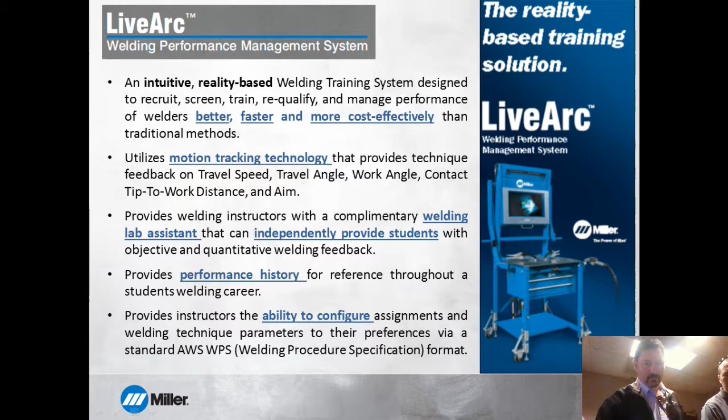One thing we have done is they have a new gas composition that they've just introduced this last year, which adds a little bit of carbon tetrachloride to the gas mixture, just a trace amount. What it does is the chlorine reacts with all the monatomic hydrogen. Gets all the hydrogen. So we're looking at the possibility of low hydrogen welds with that gas in our process.

Live stream. Good, yourself? It's pretty good. Doing all right. Are we using our own PCs? No, we're on here, so we'll need a jump drive. Do you have a jump drive? I don't have it on me right now. I have it saved on my computer. I'll do it during lunch. I'll get it all set up. Okay. I have a video and just want to make sure that works. I brought a computer just in case. You need sound? That's fine. I just wanted to make sure. Speaker's right there.

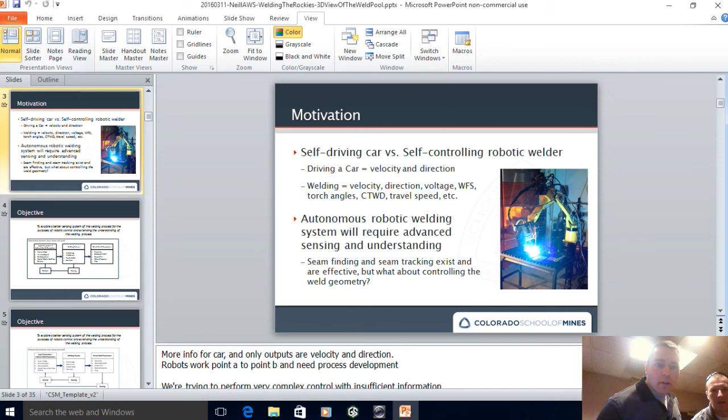Under view, far right, up there, view, and then look at the view. It should be in presentation mode.